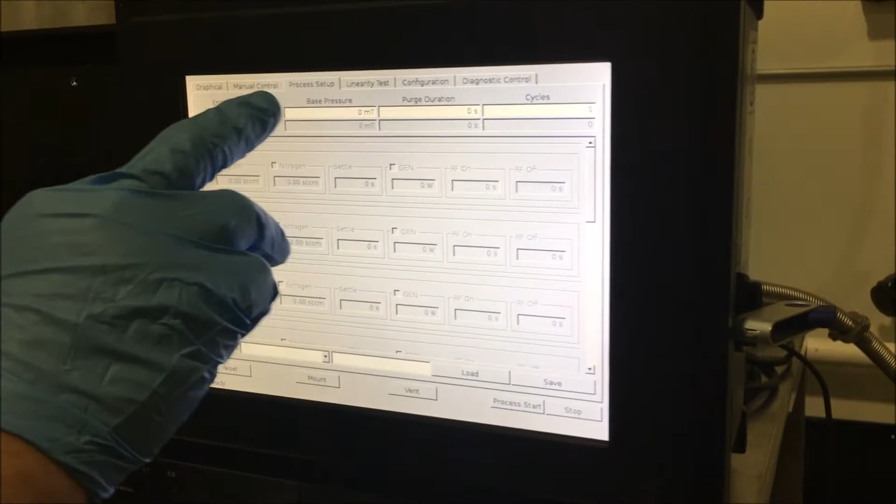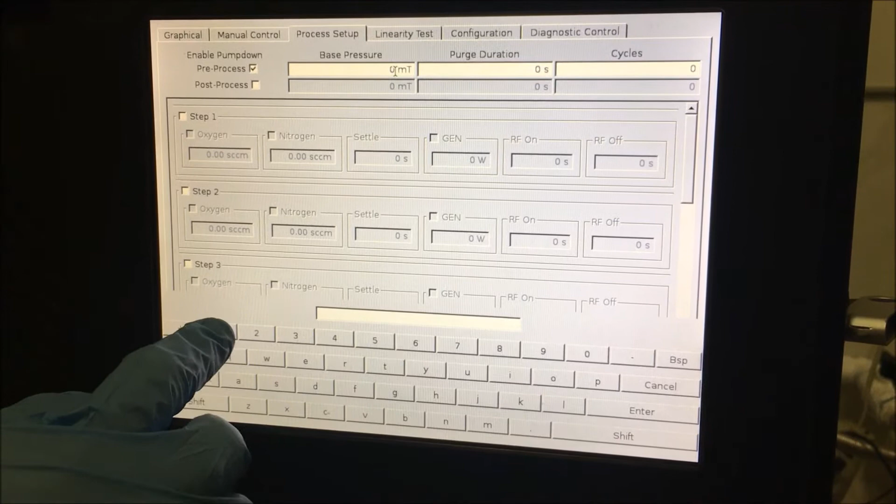Turn on the PM600 and we're going to allow the new control system to boot up. Okay, so what we're going to do here is we're going to go to process setup. We're going to write a recipe, and we want to enable the pre-process pump down, and we're going to have it pump down to 150 millitorr crossover pressure. So we'll put in 150, enter.

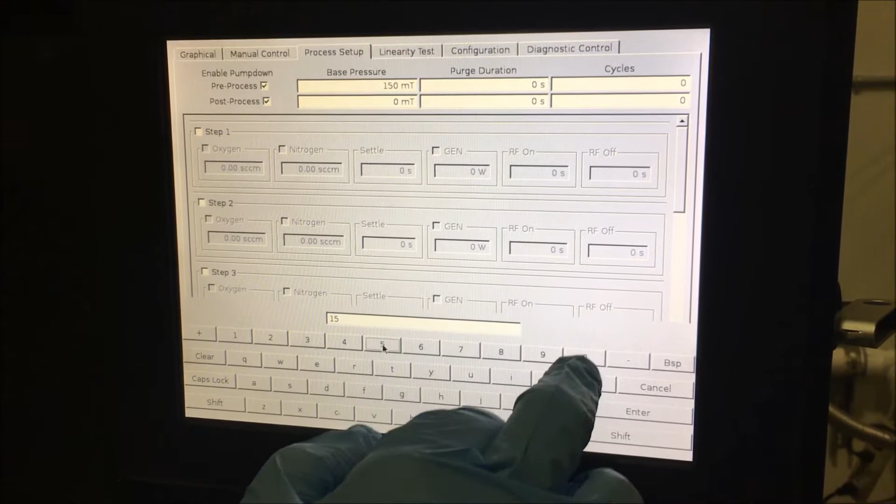We'll also enable the post-process pump down. That will be after it's processed your recipe. It's going to pump down before we vent to atmosphere, and we'll put 150 also as the setting in that.

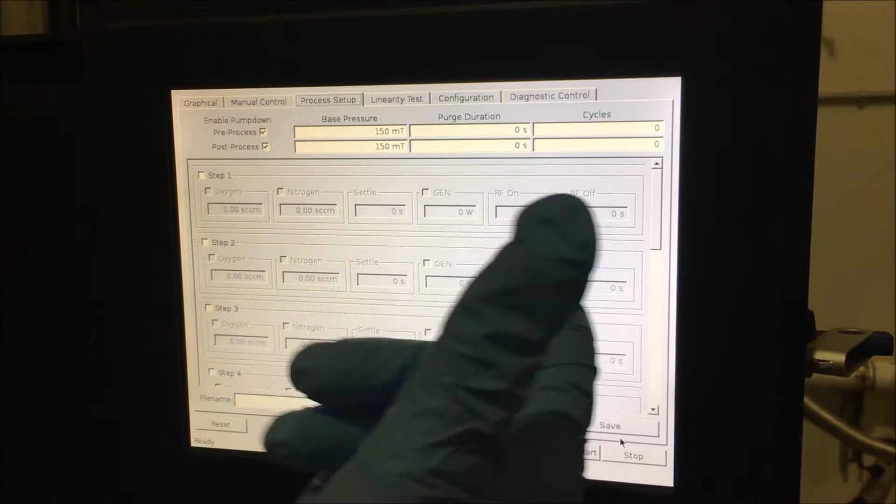The purge durations and the cycles: we can do a quick purge on the pre-pump down if we want, and we can select how many cycles. Same with the post-process, we can do a 1 or 2 second post-process purge, and then how many cycles we want. For right now, we aren't going to do any purges or cycles.

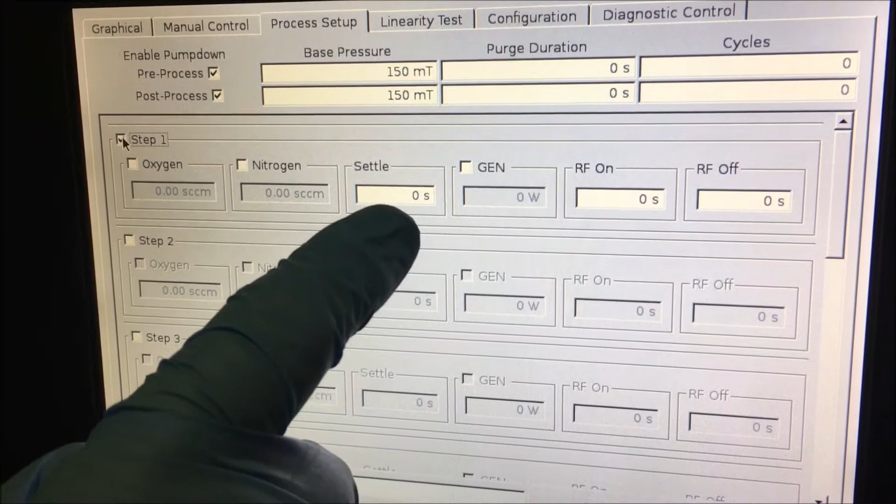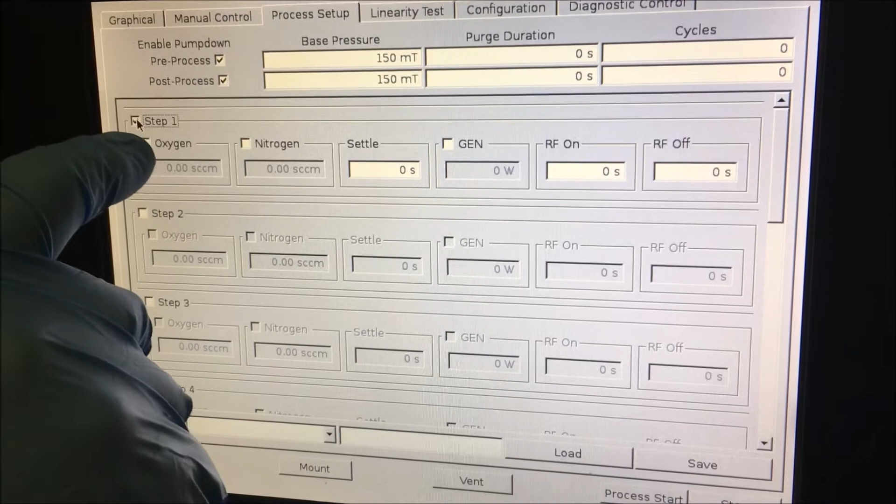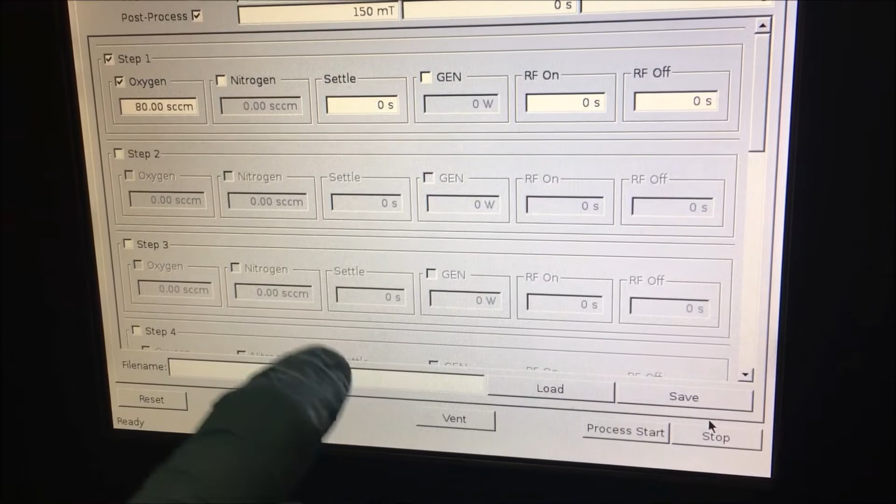Then we want to enable step 1, and we can select our gases, stabilization times, the settle time. We can turn on the RF generator, our wattage on the generator, and then the time we want to run the process. So we'll enable oxygen, and we'll do a setting of 80 SCCM. Type in 80 SCCM, and we'll give it a 30-second stabilization time before the RF comes on. We'll enter in 30,

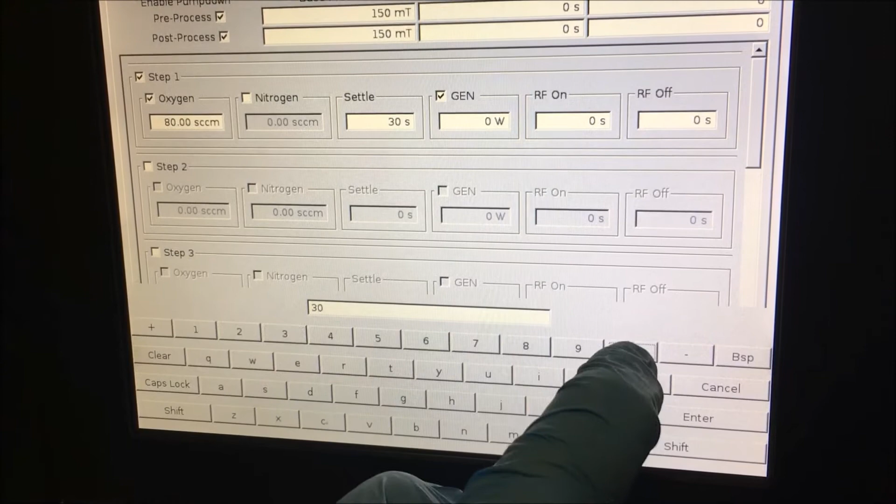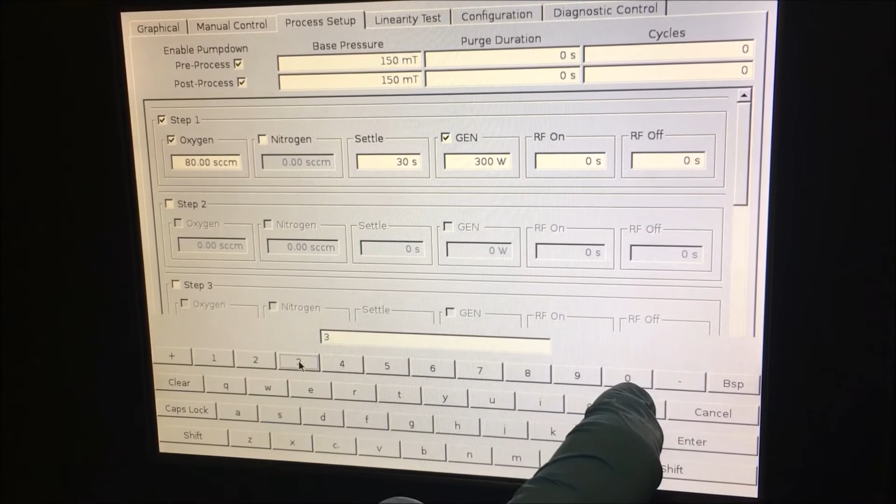and then we'll enable the RF generator, and we'll do 300 watts on that, and just for the video we'll put 30 seconds for the process time. Now the RF off, this would be used if you wanted to run more than one step. It would delay the RF before it would go into another step. So if you had gas flow changes, you would want to do a delay to allow the gas flow to change. For now, we're just going to do the one step.

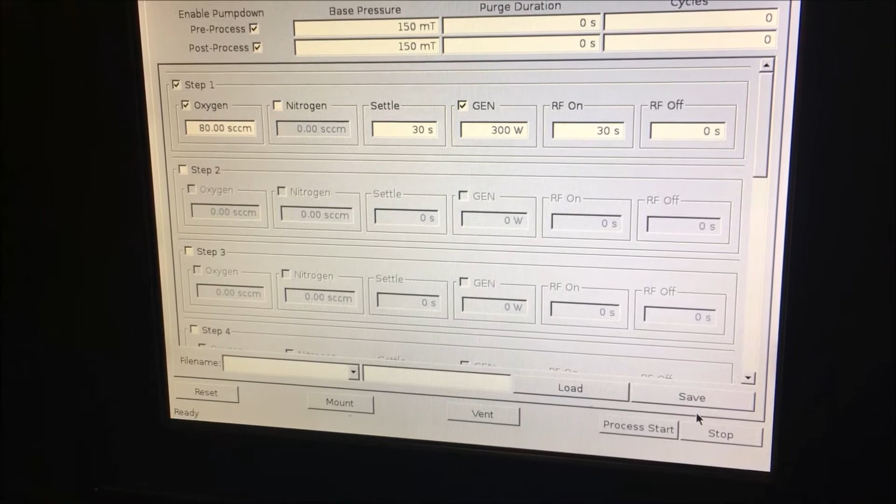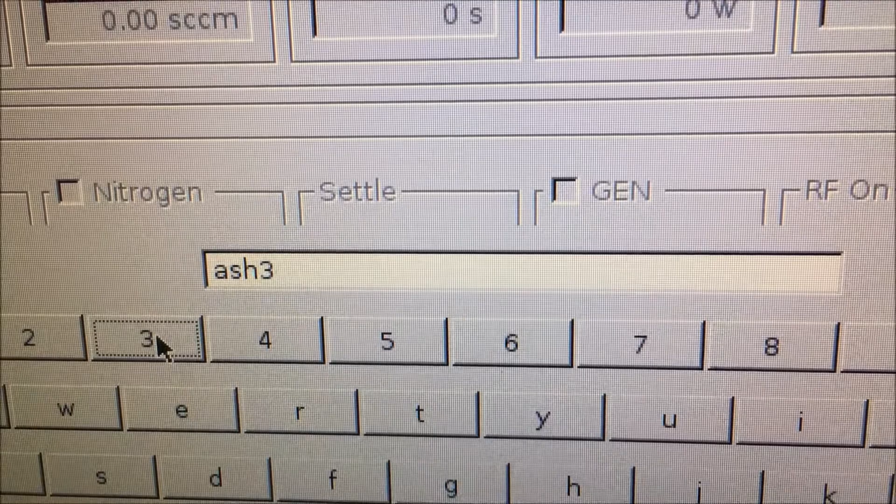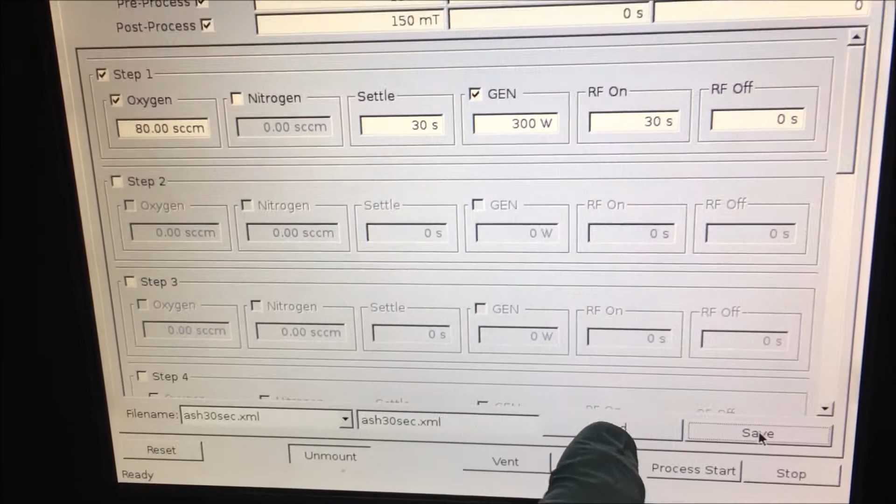So we've got 80 SCCM oxygen, 30-second stabilization time, 300 watts RF, and we have RF on for 30 seconds. We'll call this recipe ash 30 seconds. Enter. Now we want to save this to the USB. The USB over on the side here, this is where our recipes are stored. So I want to go mount. I want to save. And then now I want to load the recipe. So now we've written a recipe, we've saved it to our USB thumb drive, and we've loaded our recipe.

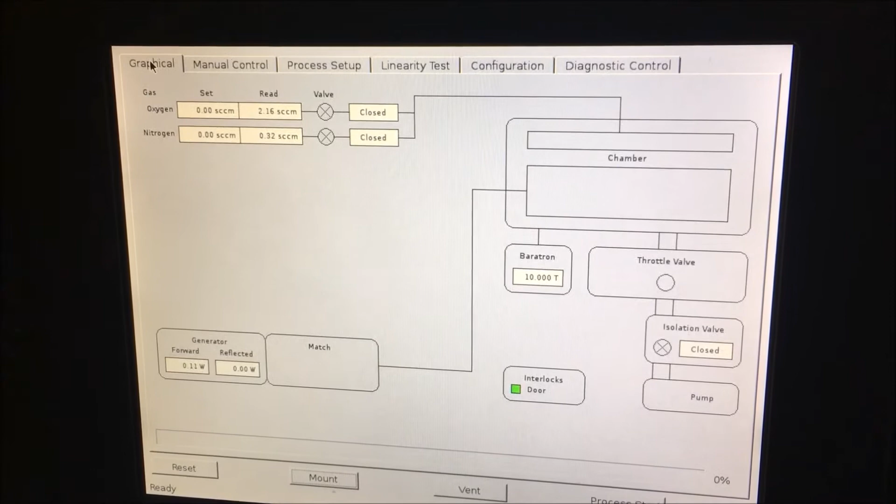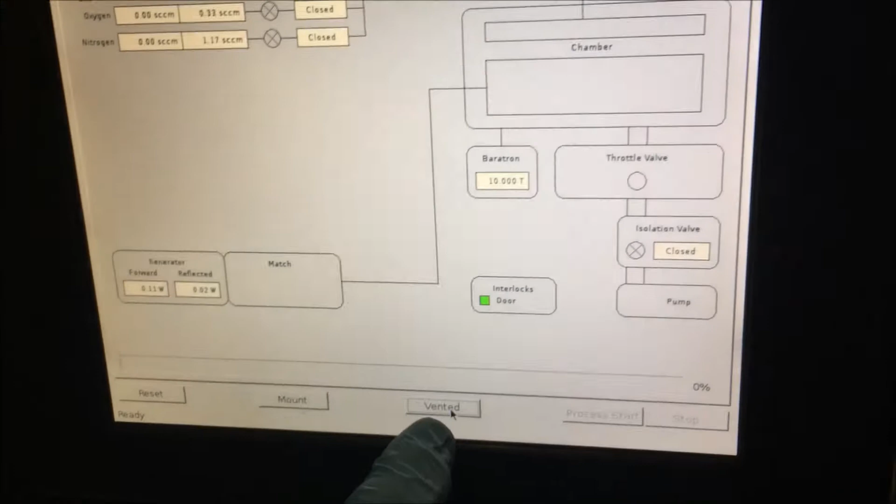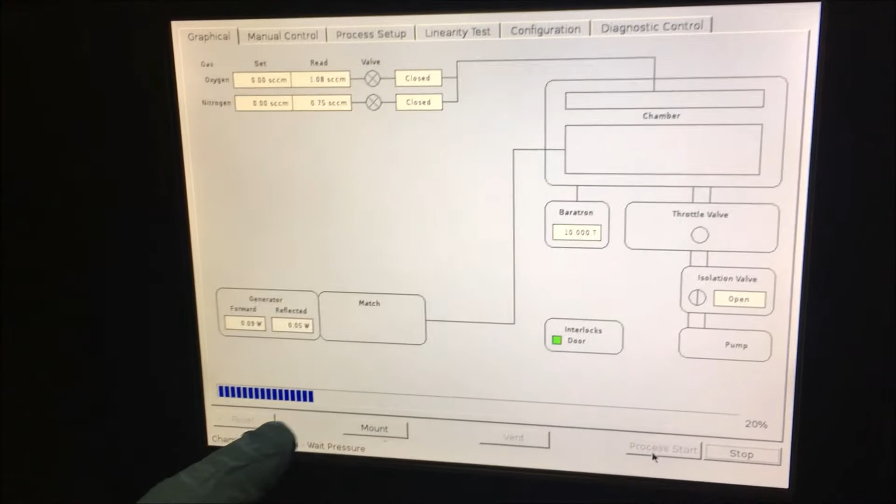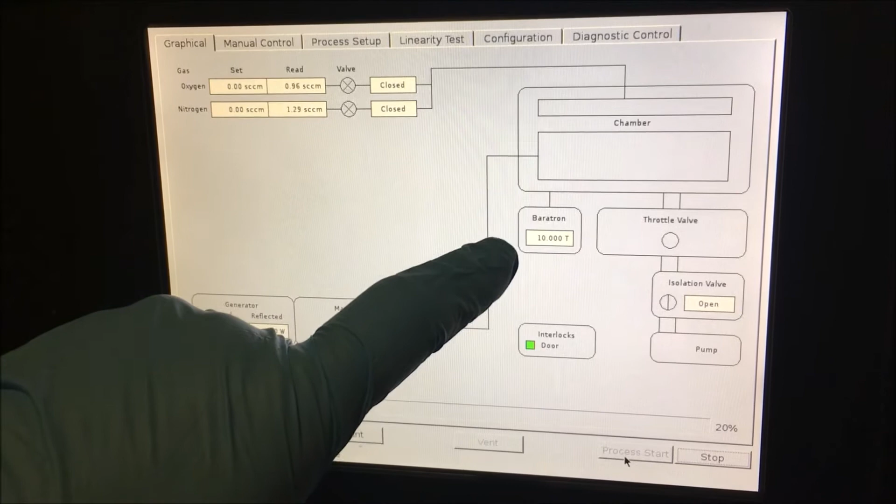So now we'll go back to our graphical page, and the chamber is vented, you can see. We're going to load our material. And we'll go ahead and get it pumping down, and we'll hit process start. Now you see this line here, it kind of shows the progress of our process so far. Isolation valve, vacuum valves open. Our Baratron will show once we get under 10 torr, we'll start to see the pressure.

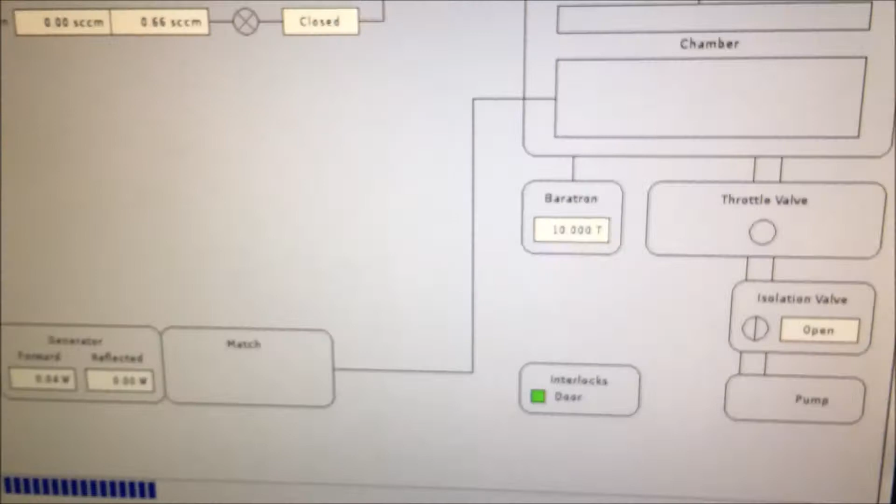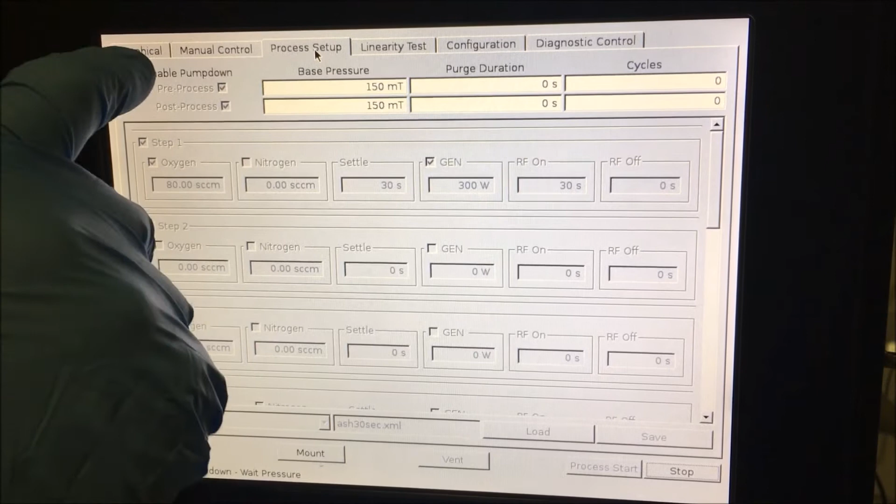Once it gets to 150 millitorr, we will turn on our gases, and you can see we can always go back to process setup and see where our settings are. Obviously things are grayed out because we have already made our changes. We're running a recipe, we're not allowed to change it. So see, now our pressure is down to 1.5 torr, coming down.

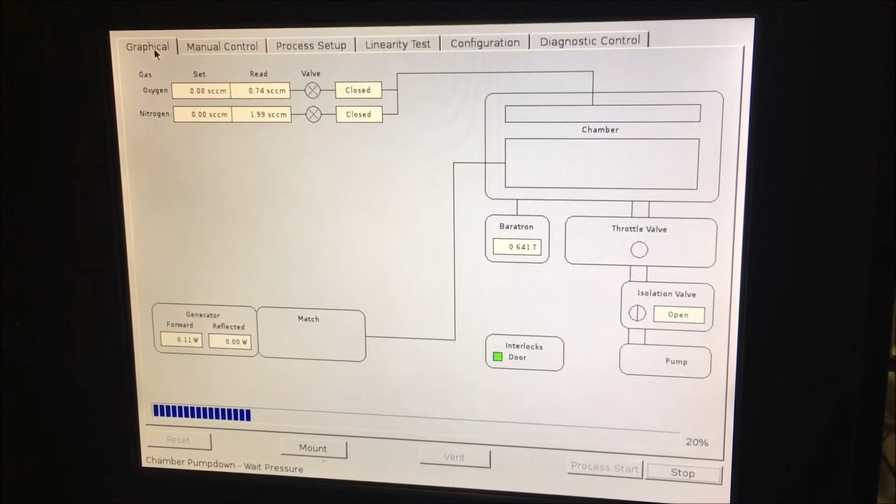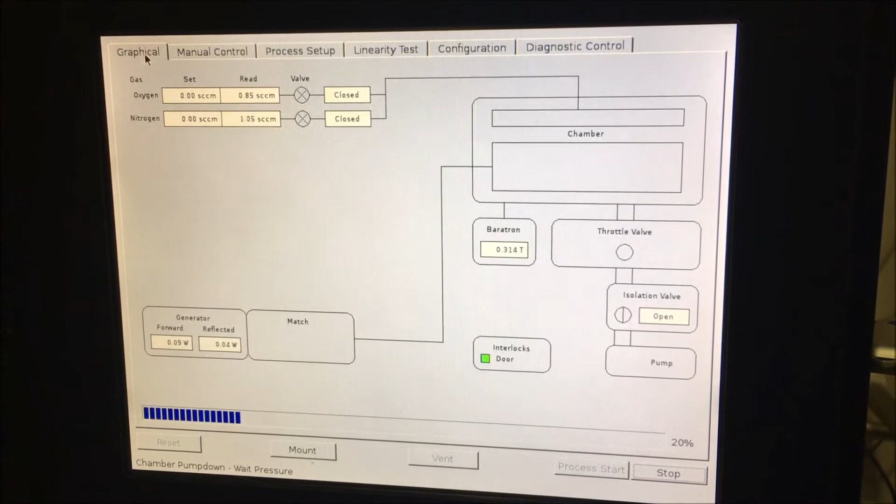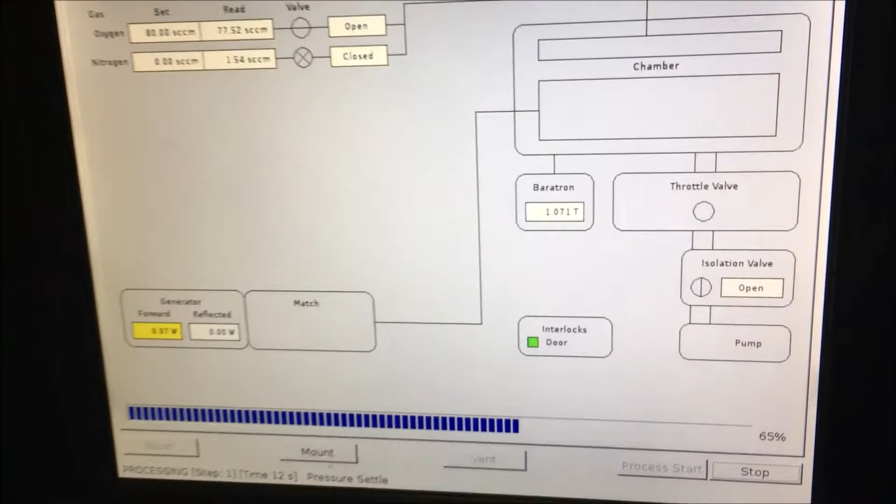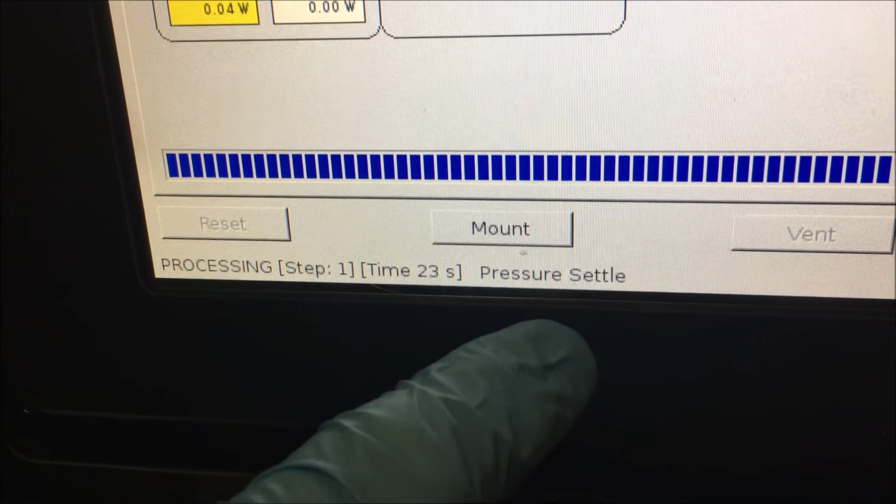We'll see our oxygen flow. The valve will open. Where we are about right now. There, oxygen set at 80 SCCM. Valves open. See now here in the lower left corner of the screen, it says we're in step 1. 19-20 seconds has elapsed. We're in the pressure settle mode.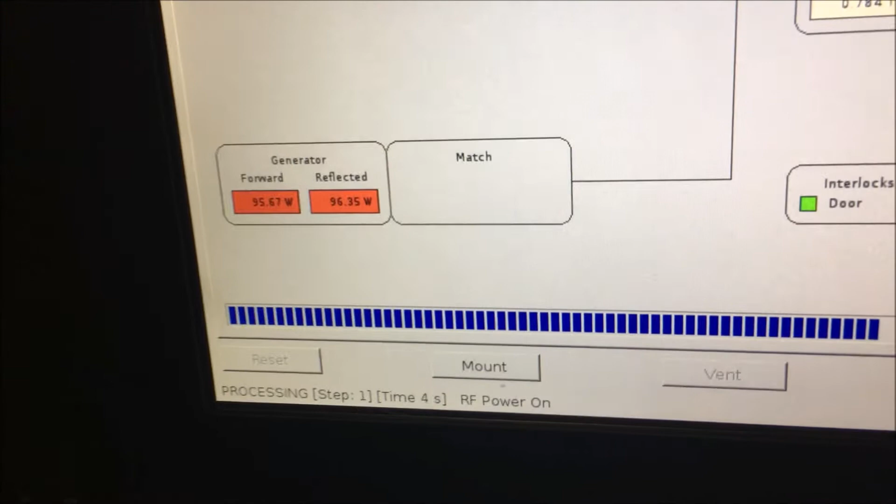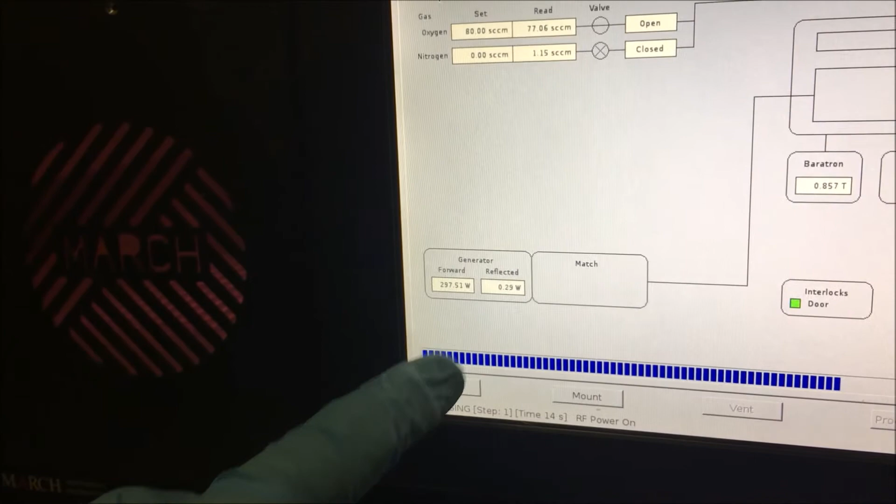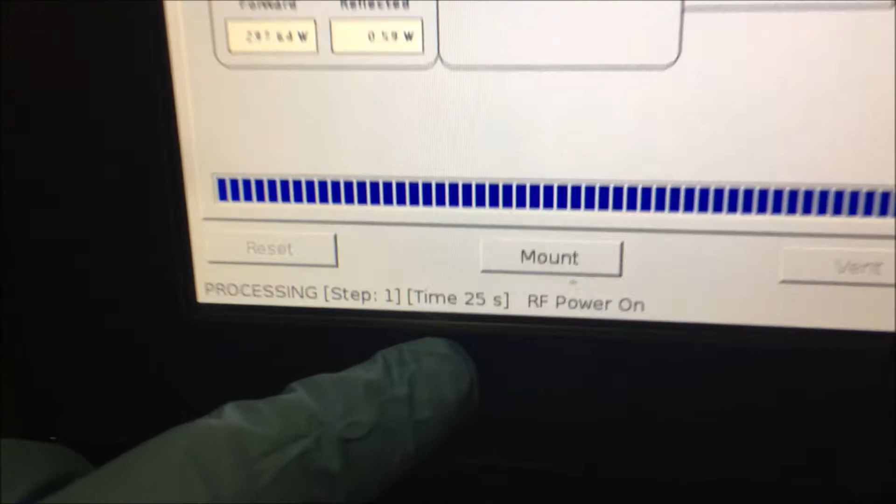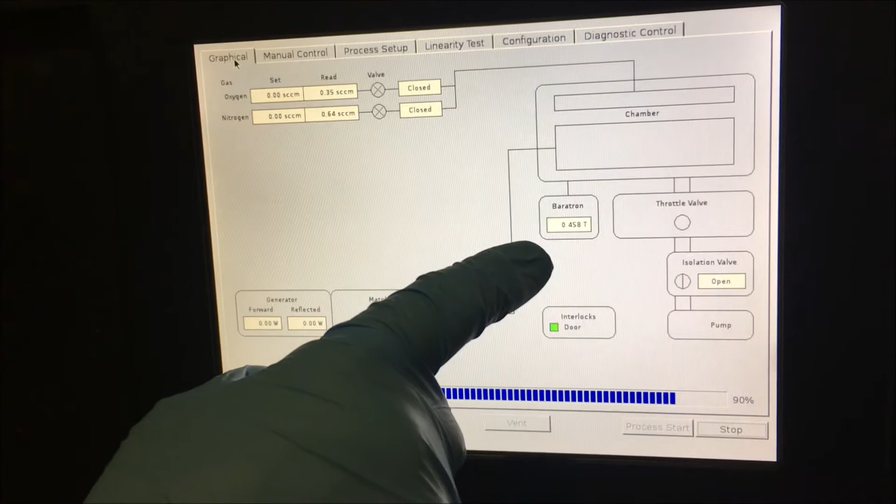Now here at 30 seconds, RF should come on. You can see the red display telling us that it's out of range as it's tuning. And you see now we've got forward power, 300 watts, 0 reflected. We have an oxygen plasma in the chamber. You can see our timer is counting up to 30 seconds. Process is complete. It's going to pump back down to our 150 millitorr post-process crossover.

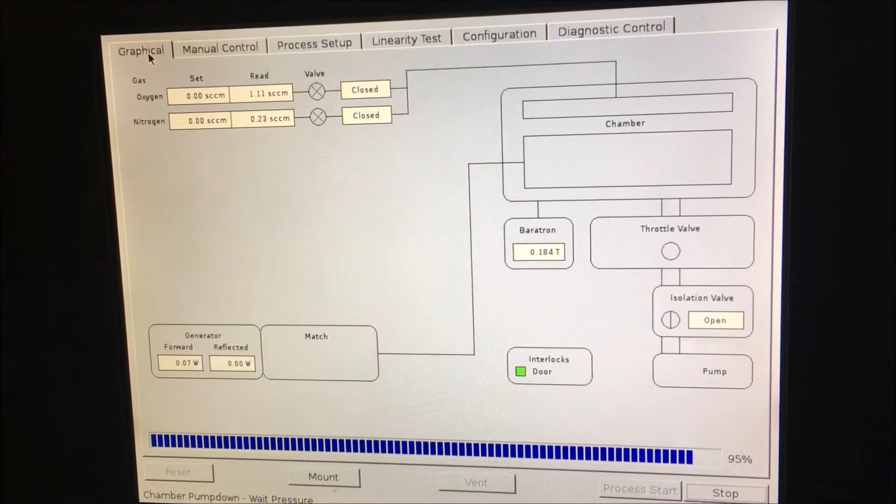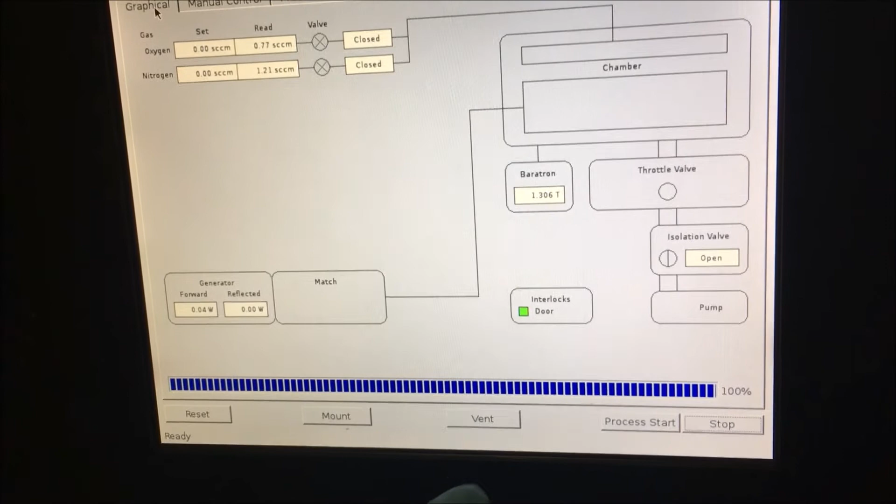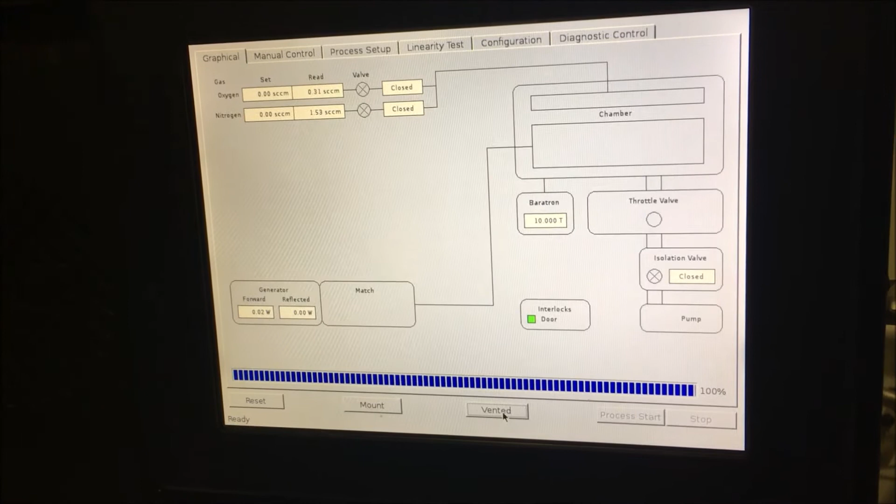Now at this point the process is run. We want to hit vent to vent back to atmosphere. Venting will take up to about 70 to 80 seconds.

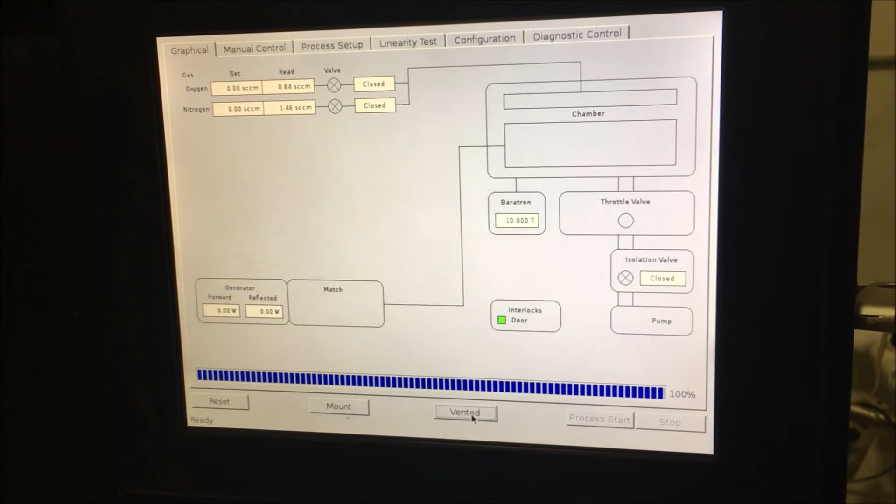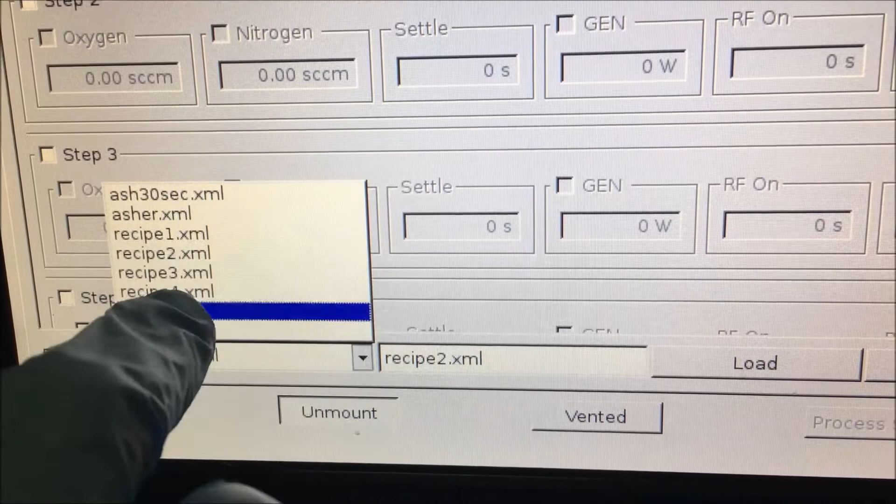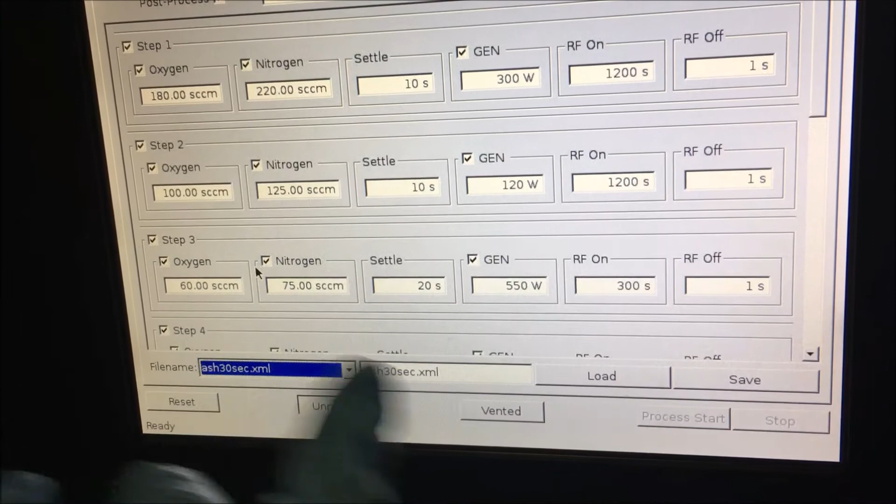Now if you want to run different recipes, we can hit mount, which looks at our USB thumb drive, and we can select whatever recipe you have set up. There I can select some of the recipes that we've been testing with, recipe 2, test 1, whatever. If you want to run that recipe, hit load, and you can see now it's loaded the multiple step recipe that we have written. Again, if you want to go back to your ash 30 seconds, select that one, load that, and it goes back to the recipe that we had initially set up.

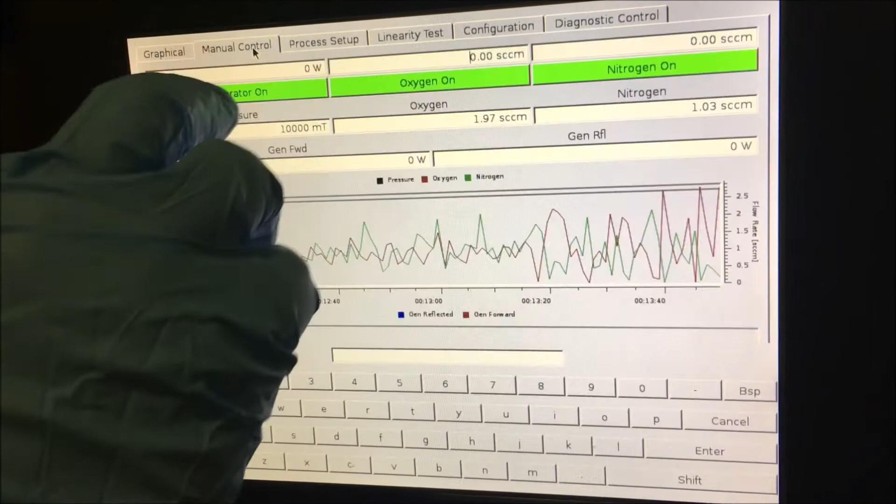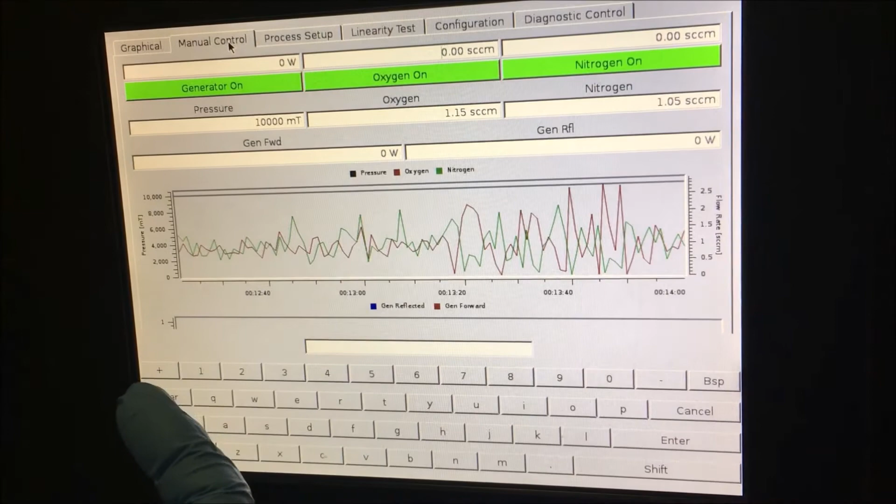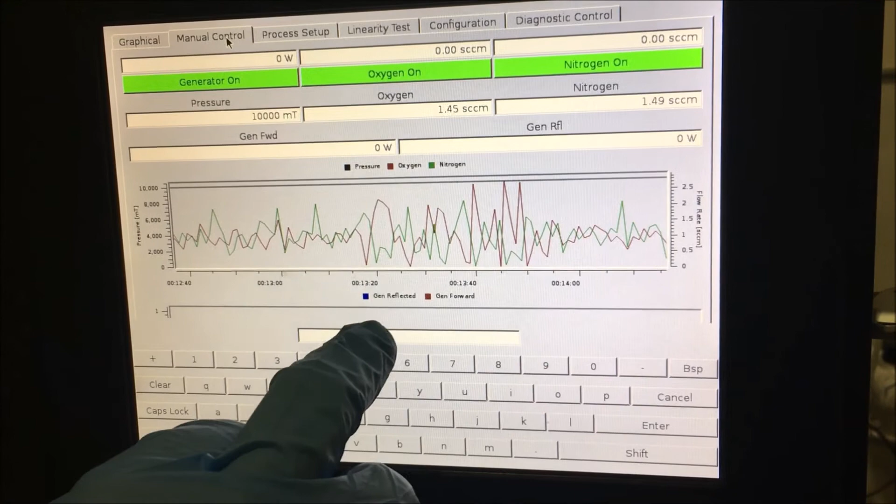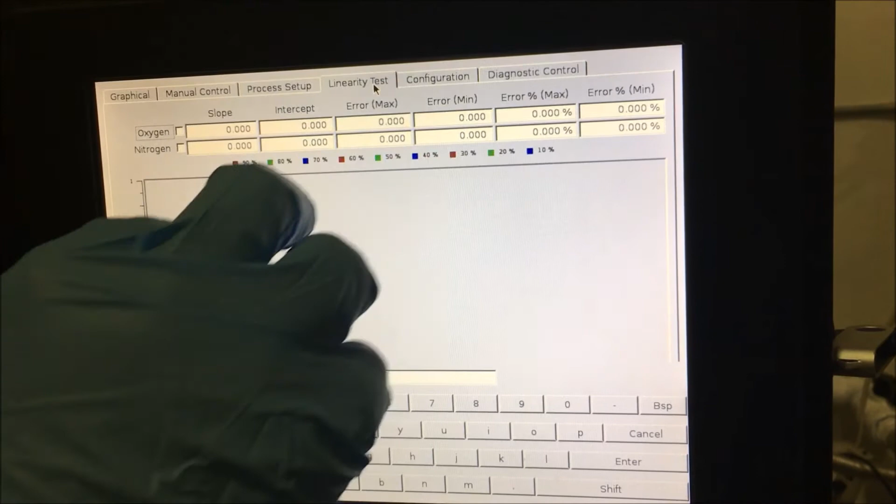Now on the different screens, the manual control would be more what maintenance personnel would use for troubleshooting. You can turn different gases on, generator on. This screen also plots your pressure, gas flows of the 2 MFCs, the generator reflected and generator forward. So you can look at your plot of pressure, gas, and generator on your process runs. The process setup is where we can edit recipes, load recipes. Our linearity test is where we can test the MFCs to make sure that they haven't drifted, that they're still in calibration.

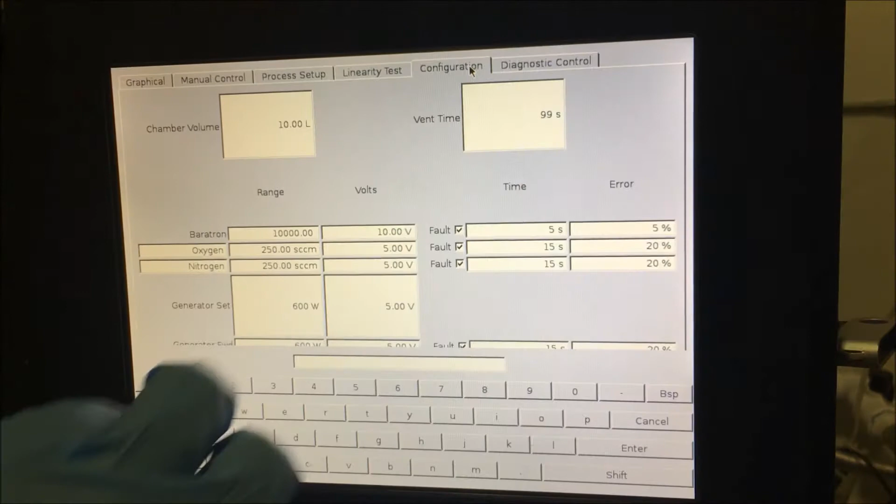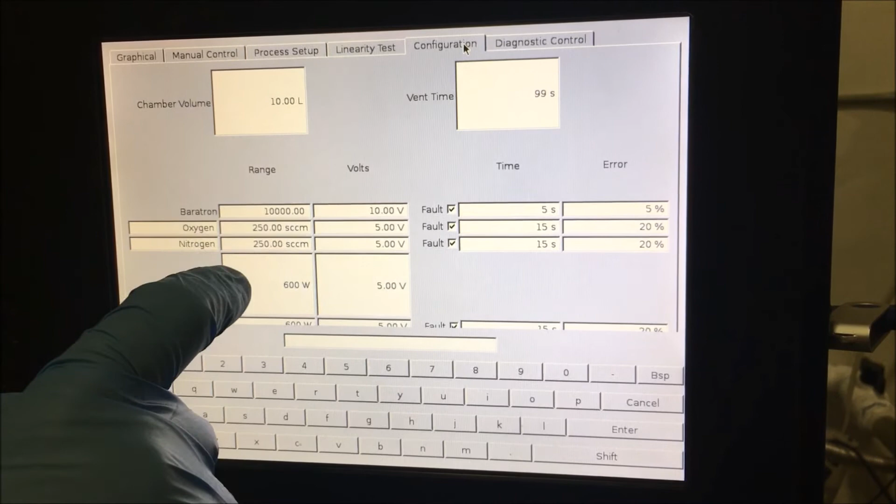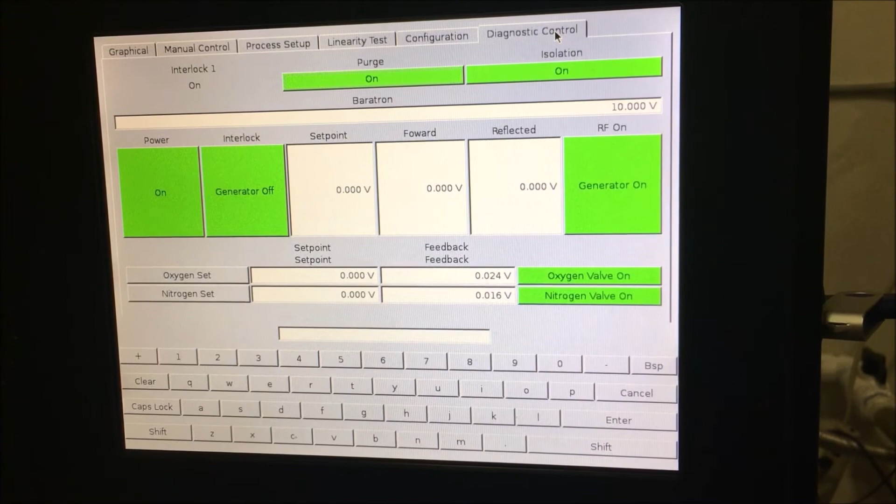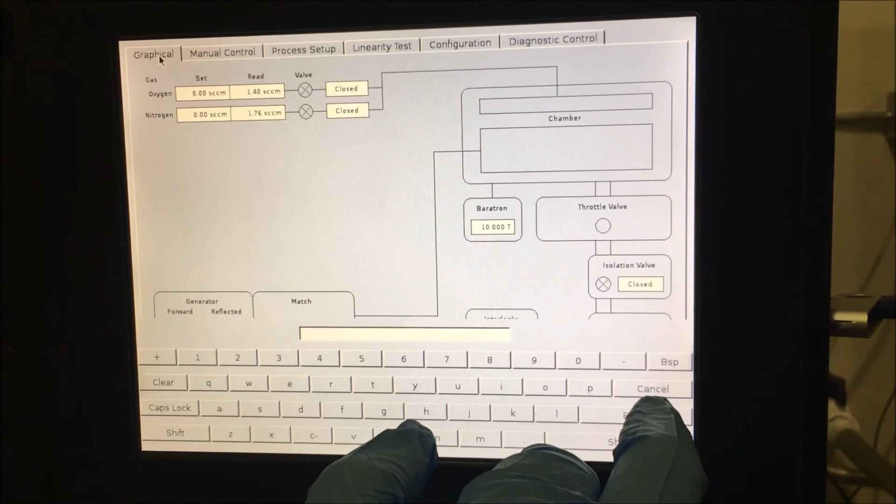Configuration is a page you don't need to change, as we have it set up for the correct size of MFCs in the tool, the correct size of the manometer, correct size of the generator, our fault windows, and our vent time. And Diagnostic Control is a page that would only be used by maintenance personnel or someone trying to diagnose the system, where we could manually turn things on and off. So the pages you really need for operating the system will be your process setup and your graphical page. And that is an overview of the new software control system.